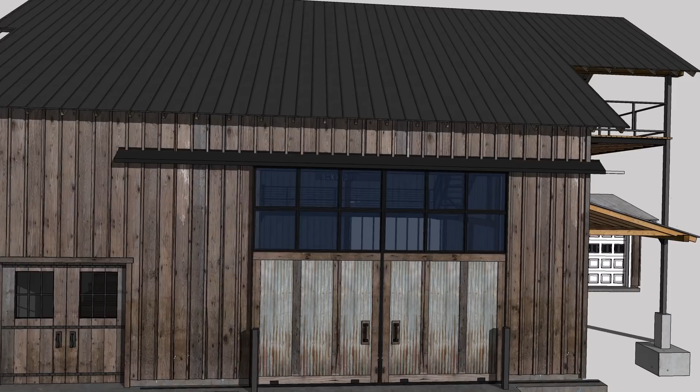With my sister's wedding 2 weeks away now, I realized there's just no way I was going to be able to get everything done on the deck in time. But I thought I could still get enough done so people could go up there and safely do whatever it is people do on decks. I guess just mainly stand around and enjoy the view.

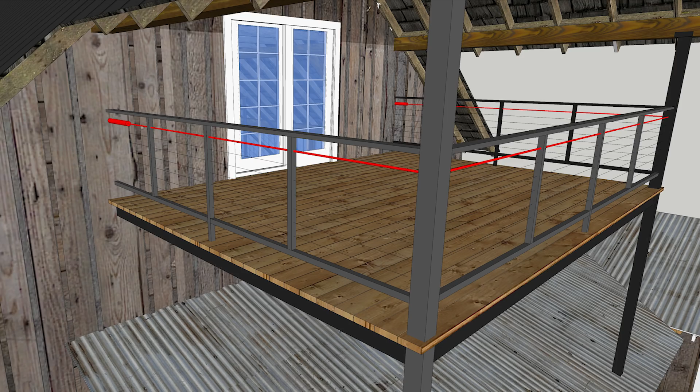This mainly entailed getting the cables up in the middle of the railings. I tried a couple different configurations for the cables. I decided I didn't want to drill through the 4x4 metal posts and run the cables all the way around the deck, just so water didn't get in the post, and I thought it'd be a harsh corner for the cables to bend around. I also decided not to just terminate each cable on the left side and the right side, because the stainless steel fasteners are really expensive. It was the biggest cost on this project, actually.

What I ended up settling on was zigzagging the cables down each side so they'll just be fastened up top and then down at the bottom. This seemed like the best choice because I was only going to need 6 fasteners for the whole deck, and I didn't have to go through the corner posts.

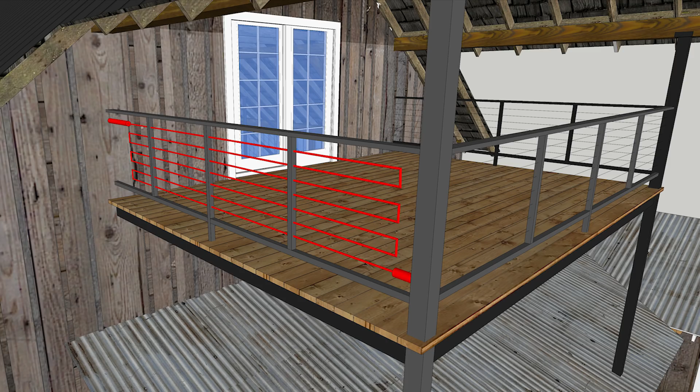But now I needed to design some cable runners to route the cables in this design. This sounded like a fun challenge, and I thought it'd be a good project for the new CNC table. I wanted to give the ends a gradual curve, which would be easier on the cable, and I felt like it would keep it from fraying over time.

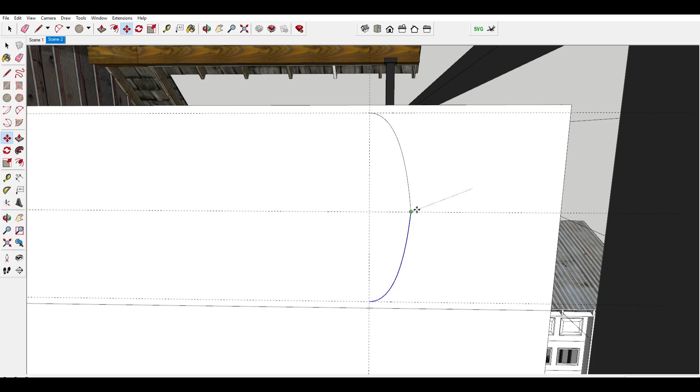So the lines I drew represent the center of the cable, and I needed to find the inside of the cable. So I drew some guidelines, half the width of the cable inward, to represent where the inside of the cable will be. I used the Bezier tool to draw a couple tapered curves that I liked, and then I could bring this edge inward to make this a solid piece.

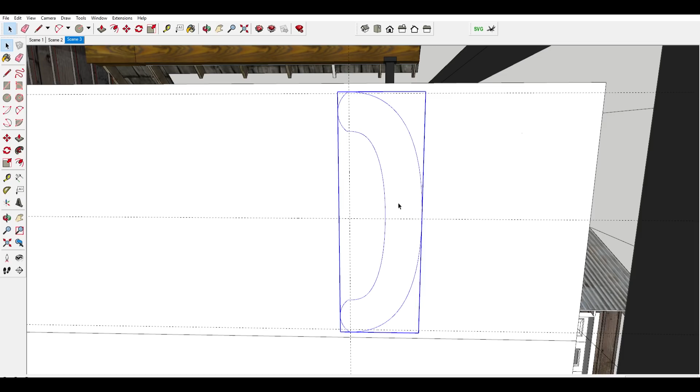And I ended up coming up with this shape that'll be the inner insert that will guide the cable back around to the other side. The cable is 3/16, so I thought I would cut this out of 1/4 inch metal, which would give it just a little bit of wiggle room inside.

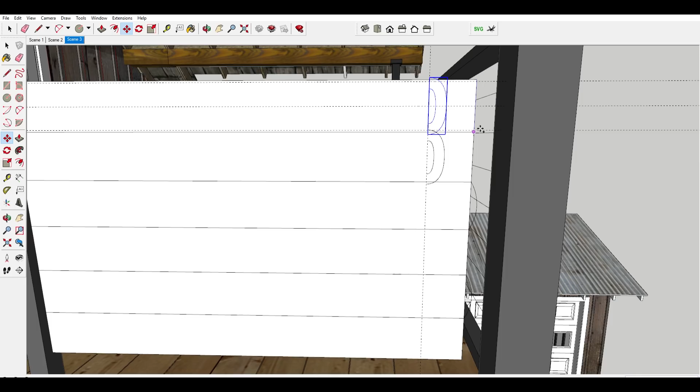Now that I had the inner inserts done, I needed to design a couple pieces that'll sandwich them and hold them in place at the right distance from each other. These outer pieces also need to keep the cable from slipping off the inner insert, so they need to be a little bit wider and protrude past it.

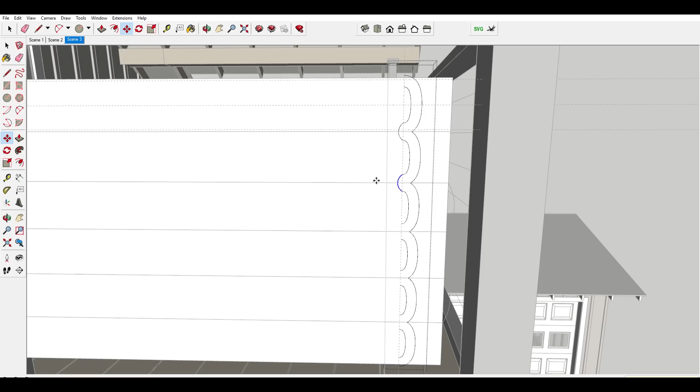So I reused the same curves and just extended it out a 1/4 inch, and then the inner curve I just kept the same, so it'll be flush. I gave it a couple more curves to enclose the shape into one piece, and then after some cleanup, I had this shape.

When I started designing this, I had a lot of trouble because I was thinking way too much about what it should look like instead of what it needed to do. I always really struggle when I'm staring at a blank sheet and my mind kind of goes in a million directions. I lost a lot of time on some really bad designs.

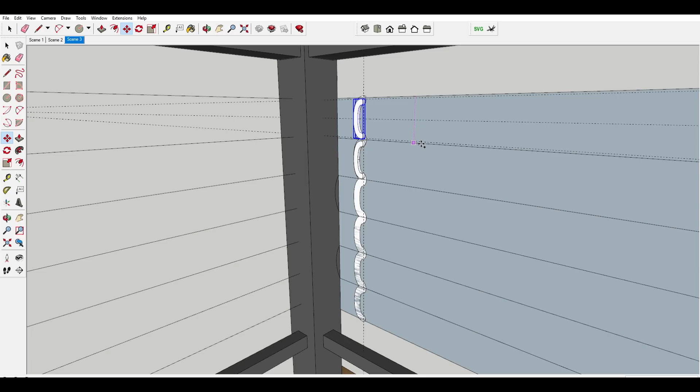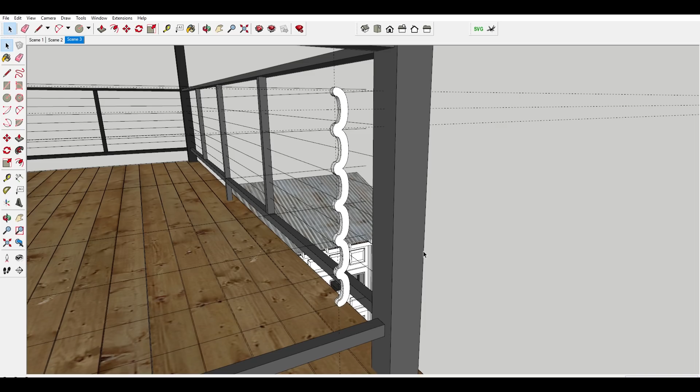But then I started over and I forced myself to focus on what the essential purpose of this project is. In this case, it's basically just that inner curve to redirect the cable. Once I had that single curve drawn, the form and the shape fell into place pretty quickly and easily. For me, and how my brain works, the form always follows function.

After adding some more curves that'll give me places to weld the brackets to the metal posts, I was pretty happy with the shape it was taking. I opened them in a new SketchUp file and broke apart the sides so I could export them as a DXF file, which is what SheetCam uses to create the G-code for my CNC plasma table.

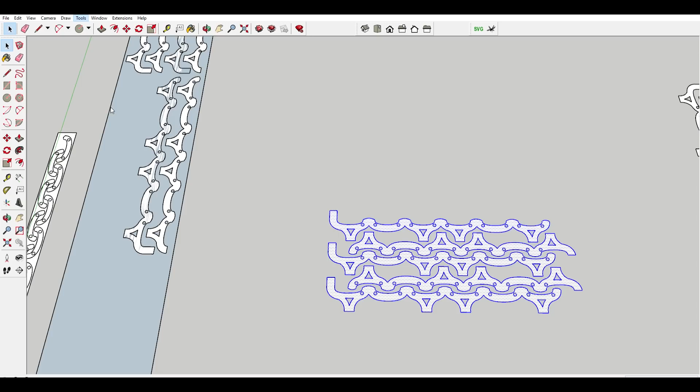In SheetCam, you specify the cut order and inner and outer offsets and that sort of thing. And it shows the path that the table will make as it cuts.

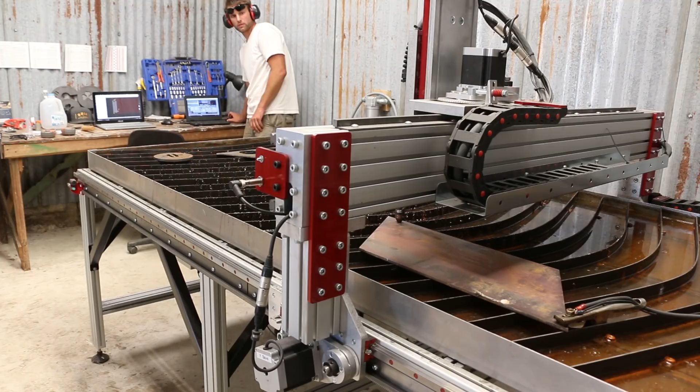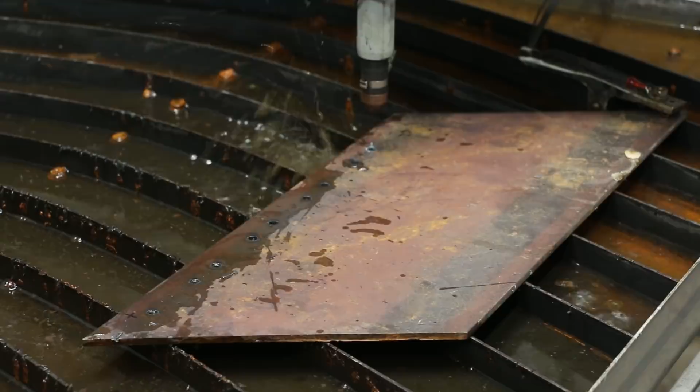Alright, let's finally get to work cutting these things out. I always get so excited to jump in and start fabricating things once I get my design figured out. I think it's the best part once you know exactly what you want to make. And I just love jumping in and working on something, taking a rendering to something real right in front of you.

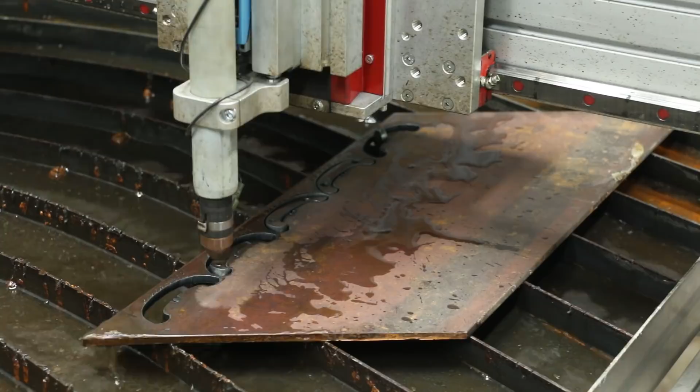A couple times now I've had the slag from the initial pierce through these thicker pieces of plate knock the torch off as it comes back around to finish the cut. And so I usually just stand real close and chip the slag off as I can. And it hasn't really been an issue since doing that. These outer longer pieces are out of 3/16 inch steel. I didn't feel the need to make them the same thickness as the inner pieces.

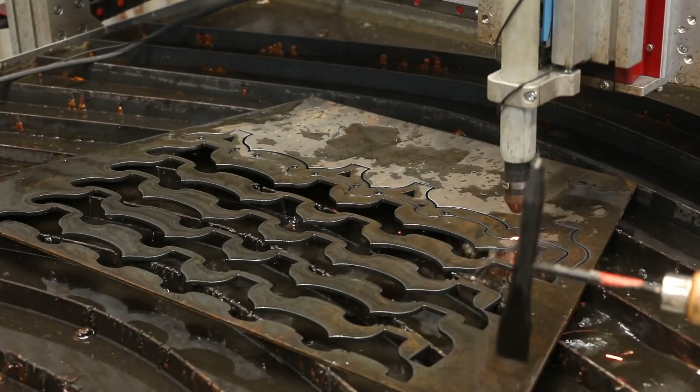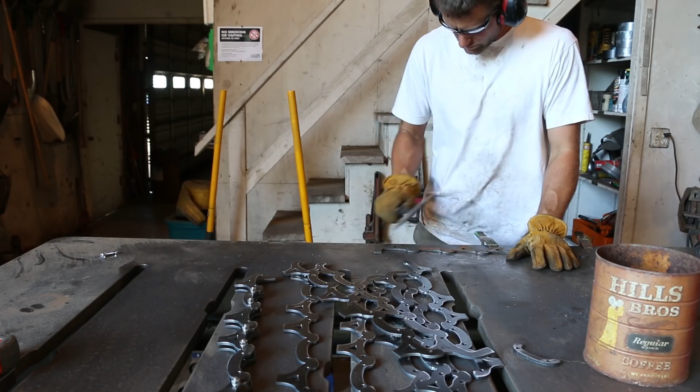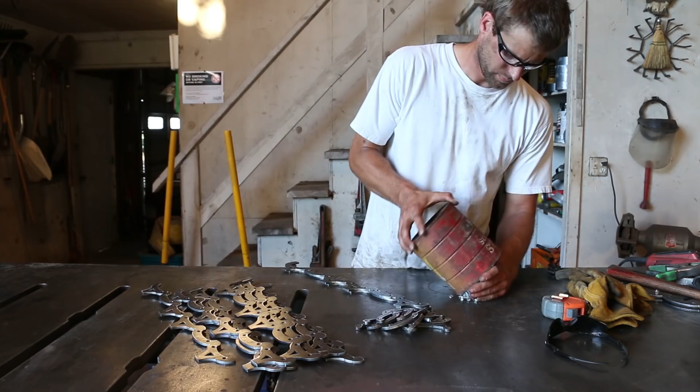After all the pieces were cut, I gathered it all up and hauled it up to our farm shop, where I got to work cleaning up the edges. This was the part I was really looking forward to, bolting them together for the first time. I'm only placing the inner inserts on every other loop, but I just made it all match for symmetry's sake. I even put bolt holes on the loops that won't be used, just for the heck of it.

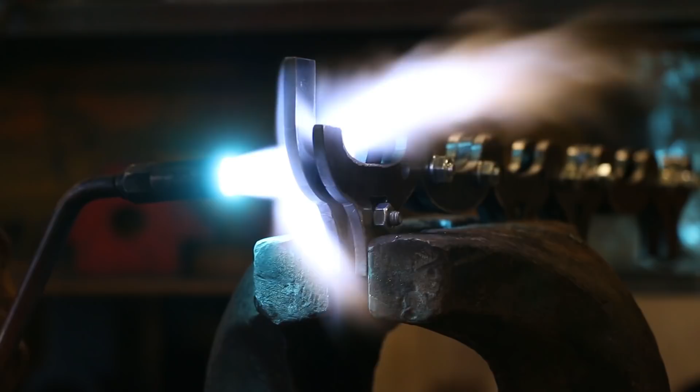They fit together great. Oops. I needed to drill a 5/8 inch hole for the cable fasteners to sit recessed in, which is why I left these ends long on one side of the brackets. I heated them up and then I could flare them out a little bit.

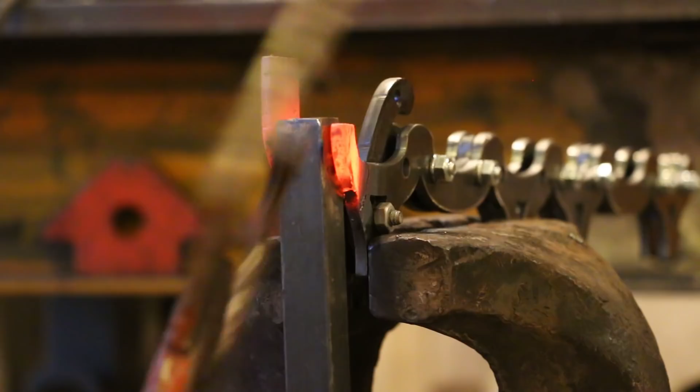And then I found some 3/4 inch square rod, which is the distance I wanted to space them, and tapped it into place, bent the hot metal back around it so I knew it would be the right distance apart, and nice and square to the rest of the bracket. Tapping the square bar down just a little bit let me heat up this top piece that protruded and bend it over on top of the opposite side.

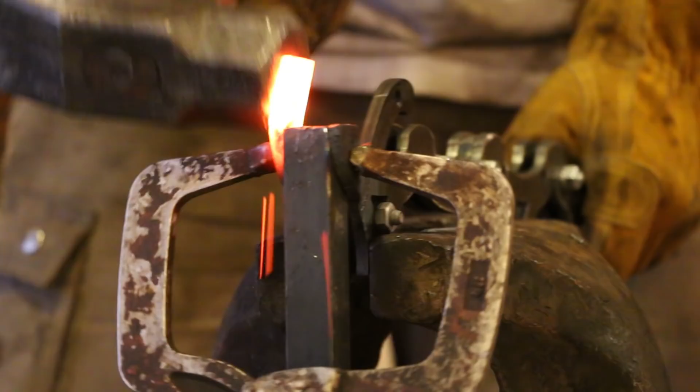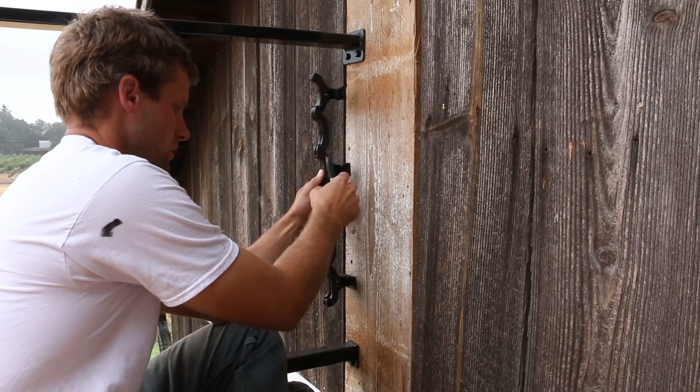Some tacks across the side hold them together, and then I cleaned them up with the angle grinder. After drilling the right size hole for the fastener and giving them a couple coats of paint, they were ready to be mounted. On the two fasteners that are getting mounted to the barn, I also welded some tabs on the backside that I can sink some lag screws through. I drove them in most of the way with my impact driver and then finished them off by hand.

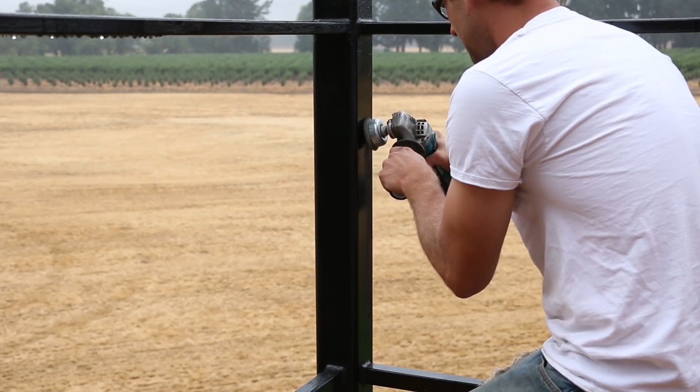I needed to remove the paint before I could weld them on the middle posts. I went ahead and welded them in place.

Drake, did you turn off my gas again? I'm pretty sure he's always turning off the gas when I'm not looking. There's no way I would forget that often to turn it on.

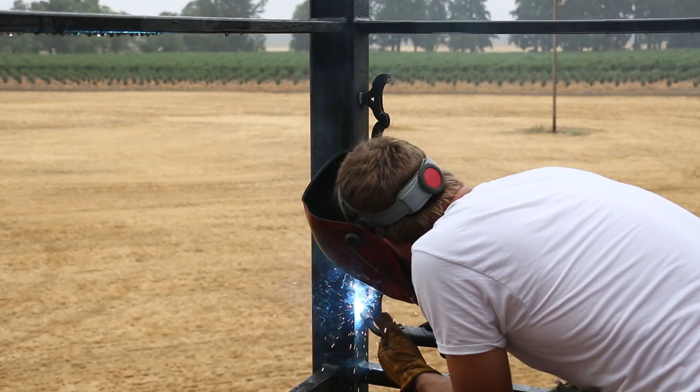I really need to be careful to get the two sides opposite of each other. The mounting bracket goes on the top on one side and the bottom on the other. I was sure I was going to have to cut one off and re-weld it, but luckily I didn't have to. It's kind of a drizzly day, so I hurried up and gave them a coat of paint before the bare metal got wet. Once they had a couple days to dry, it was cable time.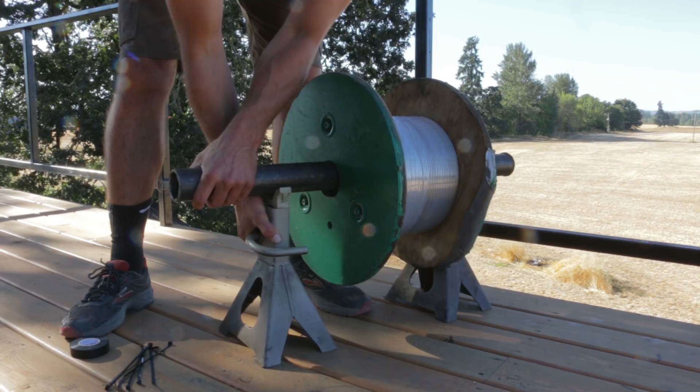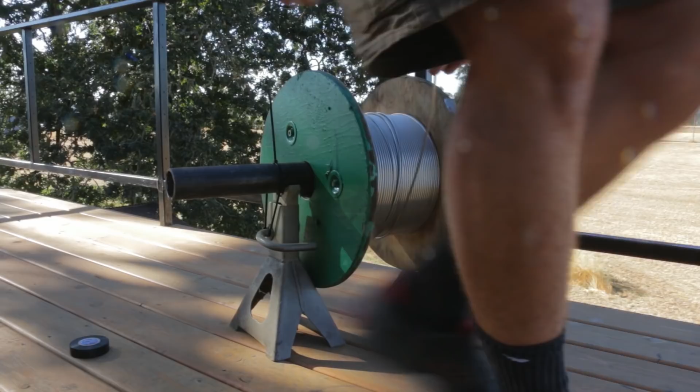I went with 3/16 inch stainless cable. The stainless cable is much more expensive than galvanized, but it seems like it's pretty much necessary since these are exterior railings and going to be exposed to a lot of weather here in Oregon. I think the stainless cable is a big step up in looks though too from the other stuff. Looks really nice. I drilled these holes 1/32 bigger than the cable size, which is, give me a second to do the math, 7/32.

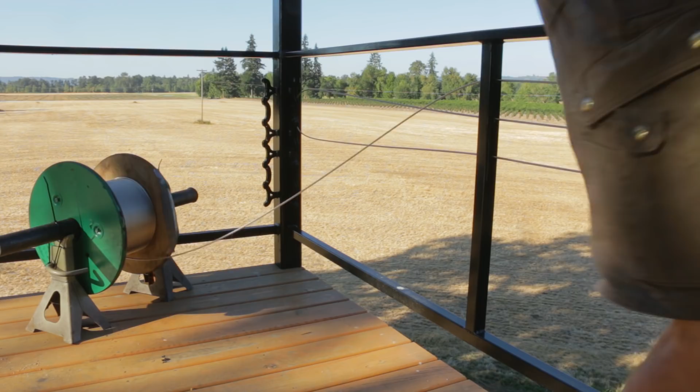I didn't want to drill a 1/4 inch because if the cable's loose in there, it really kind of rattles around and makes a lot of noise when you walk on the deck. I learned this on my inside railings. I was worried it was going to be too tight of a fit and be a real pain to get run through the holes, but with a little bit of patience, it wasn't too bad. I also thought it was going to be a pain feeding the cable around the bends in the brackets that I just made, but it was stiff enough that it kind of just fed around and wasn't a problem at all.

These fasteners are really cool. You just stick the end in and it pinches it and supposedly never comes out. The harder you pull, the harder it tightens down. I gave it a good tug and I couldn't budge it. The problem with these fasteners though is that you only get one chance to get the length right. I was really nervous about this, especially considering how expensive these things were.

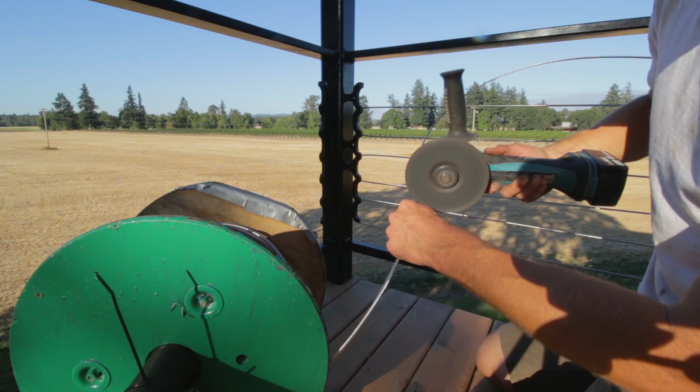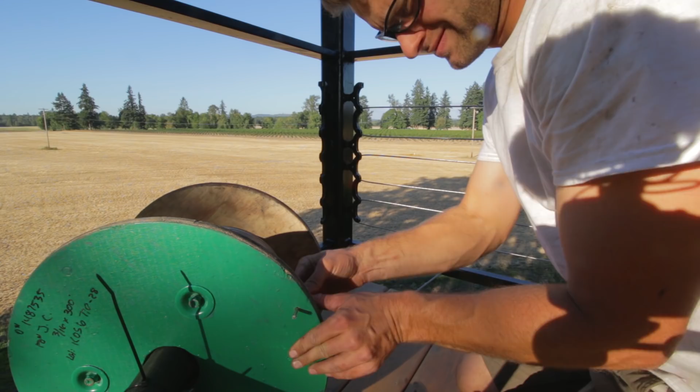I was told that if you wrap the cable with some kind of tape, it really helps keep the cable from fraying as you cut it. I used electrical tape and it worked really well. Cut the cable once, leaving about 1 foot extra of length.

Burrito. But then I got a surprise visit from the parents, dropping off a much needed burrito. That hurt your knees? Yeah. That's nice. Thank you.

Working out the way you hoped? Yeah, good. I thought it was going to be a lot harder to pull it all through, but it's kind of stiff enough that it just kind of feeds around the corners.

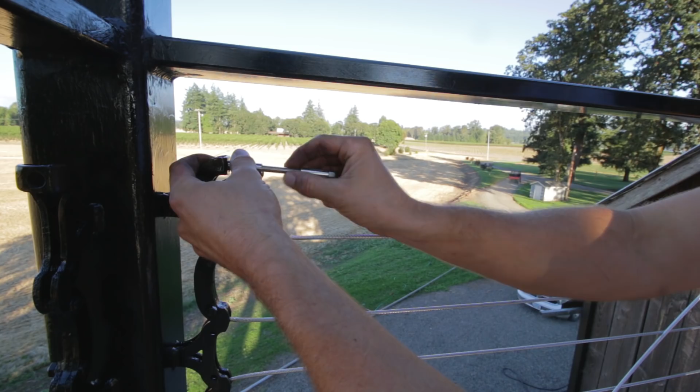All filled up now, I was ready to tackle the anxiety-inducing final cut. I pulled as much of the slack out as I could and set the fastener to as loose as it would go. Just a couple threads screwed in, and then I went ahead and cut it. It seemed pretty close, but I wasn't sure how much slack I was going to be able to pull out by tightening the fastener down.

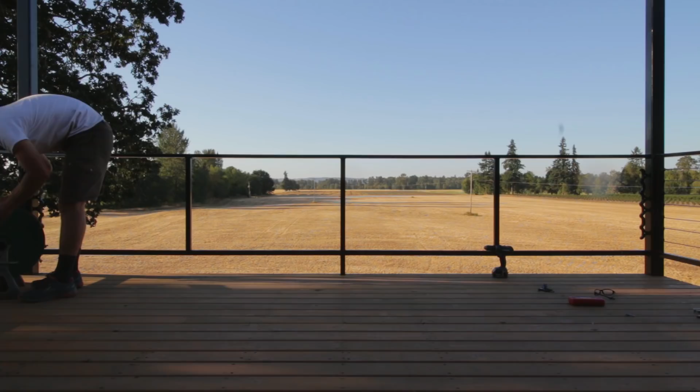The cable was really tight by the time the fastener was tightened all the way down, but I'm a little nervous the cable might stretch a little bit over time. I might have to put one of the tightening fasteners on the other end to take out some slack down the road.

I really enjoyed this process of putting the cables up. Even though it's just thin cables, it still really went a long ways to enclosing the deck and making it feel like a self-contained space. Didn't quite get the vertigo I used to get standing on the edge of the deck.

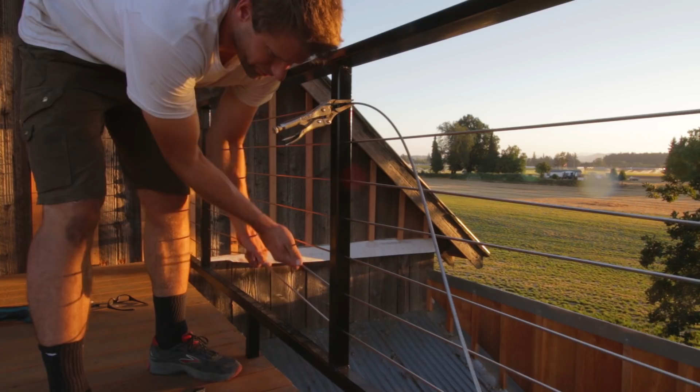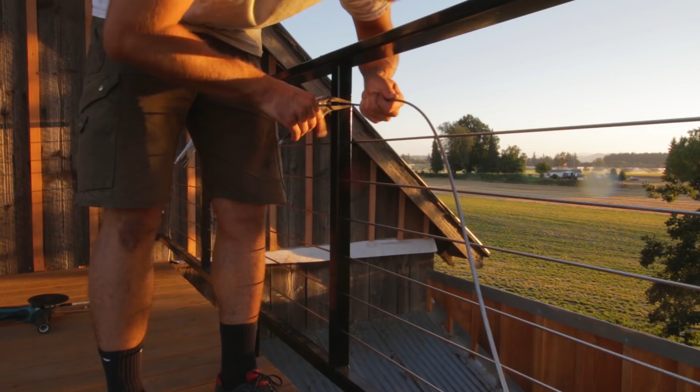And as is usually the case, by the time I'm doing the last one, I figured out a pretty good process for doing it. If I just pull outward on each of the cables and walk the slack up, you can really take a lot of it out. And the cables are really tight by the time you've done this a couple times. The vice grips were also indispensable in doing this. Drake sure wasn't going to help.

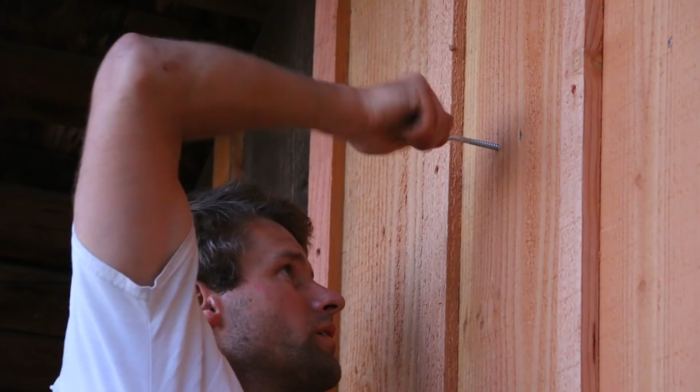The last little thing I wanted to try to squeeze in before the wedding was to put up some hanging lights. I've used these lights a couple times now on different projects, and I really like to put up cable first because the lights seem like they hang off it nice and evenly, and the tension and weight of the lights just gets transferred through the cable.

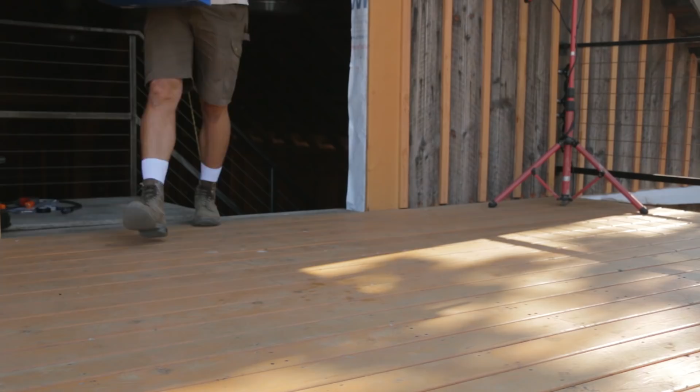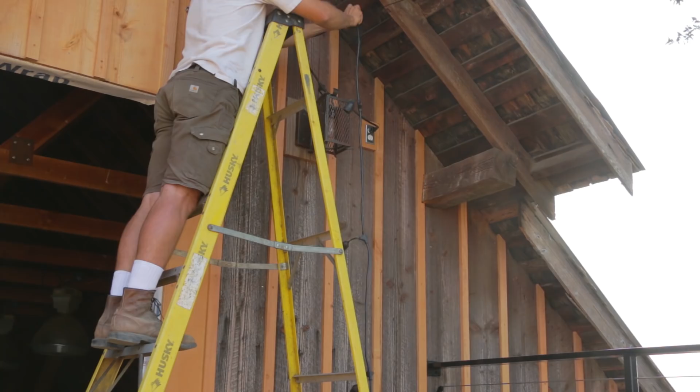Once I get the roof up over the deck, I'm going to rehang these lights so it runs up along the rafters to the peak. That's why I put this electrical outlet up top here. It's tied to the same switch that runs the lanterns. Got a little help from my dad putting these up, which was much appreciated.

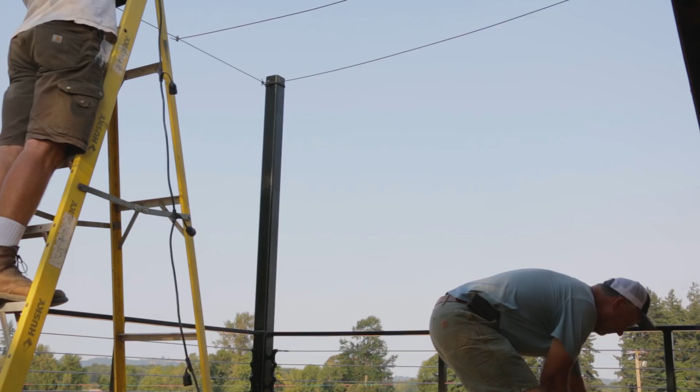And that was it. The deck was ready for the wedding. While I didn't get the deck completely finished in time, I was still so happy to get it in a state where people could come up here and check it out. With the railings done, it was a lot safer for myself, for Drake, for younger kids on crutches, and definitely safer for all the wedding attendees who might have had a glass of champagne. Or two.